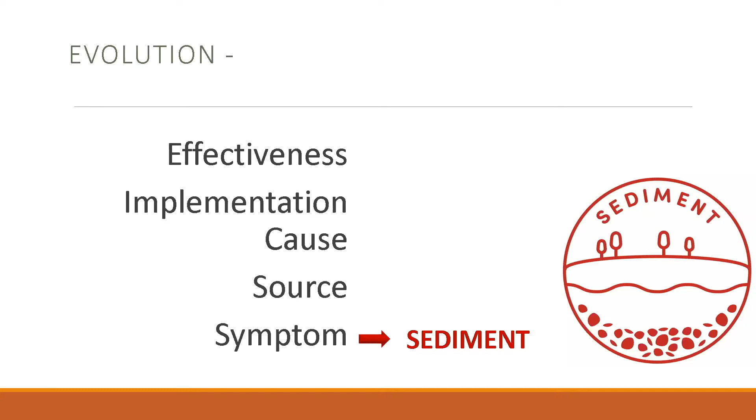And on a linear construction project, it's hard to make a sediment trap big enough to manage all the sediment you're generating if that's all you're doing. So we looked toward the source, and we realized that as we gave ourselves some cushion between us and that resource or area to be protected, we were getting closer and closer to the source of the problem. And so we saw that the more soil particles we could keep up here, the less burden it was to try to catch them down there, if that makes sense.

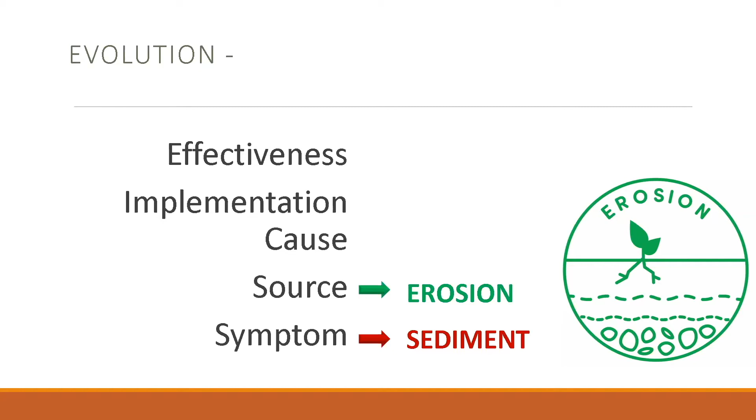And a lot of programs stop there. They call themselves cultured once they realize that it's erosion and sediment, or sediment and erosion, and not just sediment control that we're trying to achieve here. But we wanted to know more. Here in Alabama, the cause of that erosion is water. It's water flowing to us, it's water landing on the project, and so we developed this mantra of clean water in, clean water out.

And we decided it wasn't our responsibility to clean up someone else's water as it flowed through us. It was our responsibility to not add sediment or add pollutants to that water. And so we started diverting water around and under and over and away from our construction site.

We saw that it's near impossible to get sediment out of flowing water, but you can get flowing water away from your sediment. And so we started managing water and then realized that, you know, somebody's got to do this for us. We've got to convince our contractors that these are things that are important to us.

And we realized that our contractors are capable people. They are smart, they are innovative, they're also willing to do just about anything we ask them to do, as long as we tell them up front and we're willing to pay for it. And I think if you talk to your contractors, or if there are contractors on the call today, I think you would agree, if we tell you what we want and we're willing to pay for it and tell you up front, you can do just about anything we ask you to do. But we have to let you know, we have to tell you along the way.

And so at ALDOT, we realized, really later than we should have, a couple of years into this evolution, that communication is the best management practice. And so we work through these, what we call the 5 pillars of construction stormwater management. And those are really in order of priority, they're in order of effectiveness, and they're in an order of economy. You know, if we think about how much it costs to communicate with someone these days, not a big cost, especially when you compare that to some of our practices and products that are intended to capture sediment.

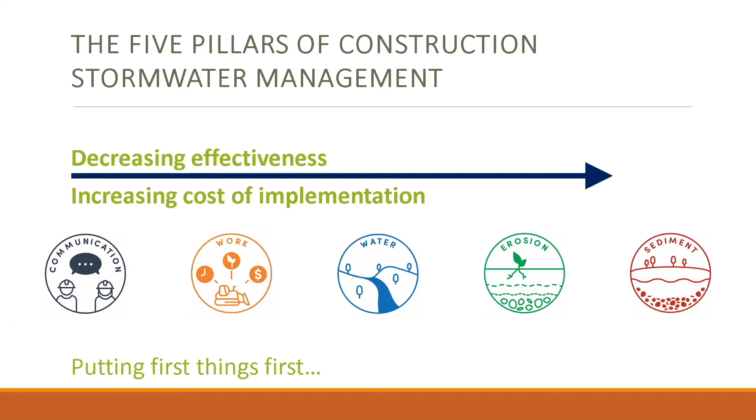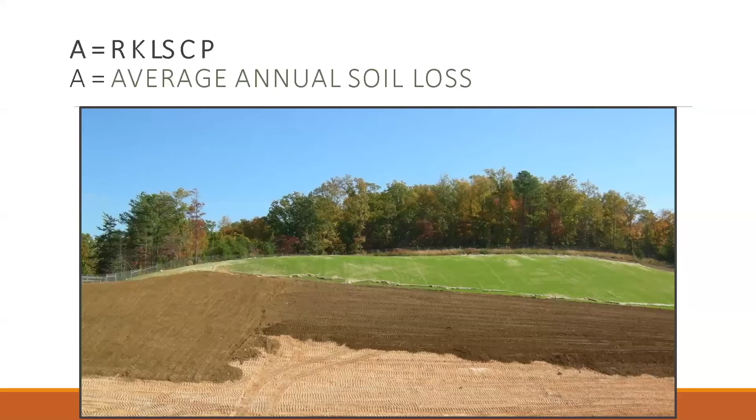So we learned about the 5 pillars. That kind of evolved over time. We also learned a lot about the revised universal soil loss equation. And I had a tendency to get really nerdy with the RUSLE equation and all those fancy and nice variables. You could plug numbers in and spit out some good information. But at the end of the day, what I learned the most about the RUSLE equation came from the product, the average annual soil loss from that slope or from that area that you're studying, and it's measured in tons per acre per year. And so what we want is the tons or the mass of sediment to go down.

And in order to make that go down, we have to either or both reduce the area of disturbance and/or reduce the duration of disturbance. So ask yourself, can we reduce the area of disturbance? Now answer, yes, we can. Can we reduce the duration of disturbance? Yes, we can. But it takes some intent. We have to manage communication and manage work to make that happen. And so those are some things going into this case study that I want to talk about now.

This is an interstate widening project, and please don't think that this only applies to interstate widening projects. Even if you work for a Department of Transportation, you may not ever get the opportunity to work on an interstate widening project. Just know that this case study does apply to other forms of construction and even other areas of transportation. So this project, you can see we're going to add 2 lanes to a section of Interstate 20, Interstate 59 in Tuscaloosa, Alabama. So Tuscaloosa is the home of the University of Alabama.

Any Alabama fans out there? Yeah, me neither. I'm an Auburn graduate. I do appreciate you guys sending the Tagovailoa family to us. I enjoyed watching Tua in college and his brother play in high school here in Alabama. Neat family and absolutely great athletes. But anyway, all that's going on in Tuscaloosa, Alabama.

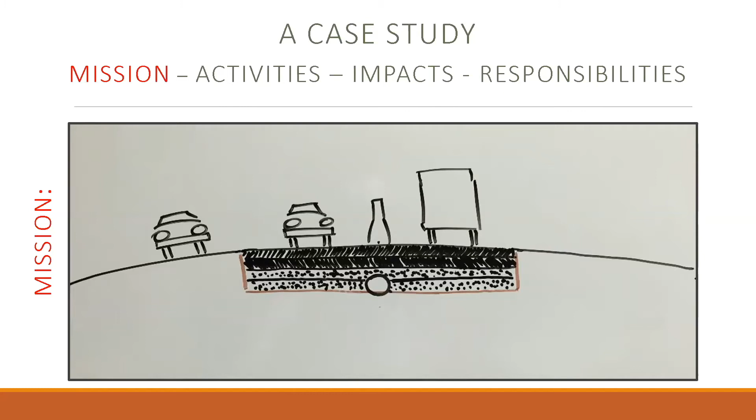So here's kind of the way I see it going into this process. This is where we were at the beginning. This is where we wanted to be. And you guys know that we need some structure, some drainage up underneath those cars as we widen to the inside of this interstate.

So thinking about this project, we're walking through our mission. We've seen our mission, what we've got to do. These are the activities we have to engage in to get there. We'll talk about impacts and responsibilities later. So in order to fulfill our mission, what's the first thing we have to do to widen this interstate?

From the perspective of a stormwater professional, what's the worst thing we can do to widen this interstate? Well, we've got to strip off all that vegetation. So 9 miles of roadway, that's about 60 acres of disturbance. And from that point forward, we are at risk of sediment leaving this project.

We don't have a lot of room on the outside within our right of way to capture all this sediment that's trying to leave. We don't control the rain, we don't control the soils, we don't control our neighbors. And so every time it rains, we're at risk of losing sediment from this roadway.

So we do a little cutting, a little filling, we compact, we put our drainage in, and this is where it really gets interesting. This is where Barry would get the call and say, hey Barry, what are we supposed to do now? We've got the regulators on our back, or we've got the water keepers on our back. What do we do?

And there's nothing you can do. Even knowing the 5 pillars of construction stormwater management, there's no sediment control to be heard of. You can see a piece of plywood on the end of that pipe. That is a best management practice. That's how we keep heavy particles from getting into that pipe. But we know any water that goes into that pipe is going to be carrying finer particles and is going to be turbid.

So the best thing we can do at this point is get out of there. Let's get this place covered up and move on. Same with our inlets, the wattles there, those are for show. The best management practice we have available to us here is that open excavated pit. Water goes in, it slows down, fast water meets slow water, so sediment starts to drop out. But we know any water that gets in that inlet is going to be turbid and we're going to have problems. But I don't know what to do about it otherwise.

It's just a tough stage of construction. But at some point, we get our drainage in, we get our crushed aggregate on top, and we get to a stabilized state, a somewhat stabilized state. But that takes a while to get there. So on a 9-mile project, maybe that's 8 to 10 months here in Alabama to get to this stabilized state. And again, 8 to 10 months of risk, 60 acres of disturbance.

So let's look at our impacts now, and they're obvious: water quality, habitat, private property, regulatory actions, civil actions. Something that was important to me is embarrassment and loss of trust and grace. My job was to keep us out of the newspaper, basically, and certainly keep us out of jail. And I had spent years and years trying to build up trust and grace among our regulators and environmental groups and our other stakeholders. And we know that one mistake, one slip up can erase years of goodwill as we're trying to build that trust and grace.

And so those are kind of the potential impacts that trigger our responsibilities. And so on this project, our regulatory requirements were pretty stringent. We had our general permit, but we also had a TMDL because of a receiving water that required this impaired receiving water required a 32% turbidity reduction and a 60.8 NTU limitation. And that's not against background. That is, the water leaving your project had to be less than 60.8 NTU, which you guys know is a tough thing to do, especially if you're working in clay soils.

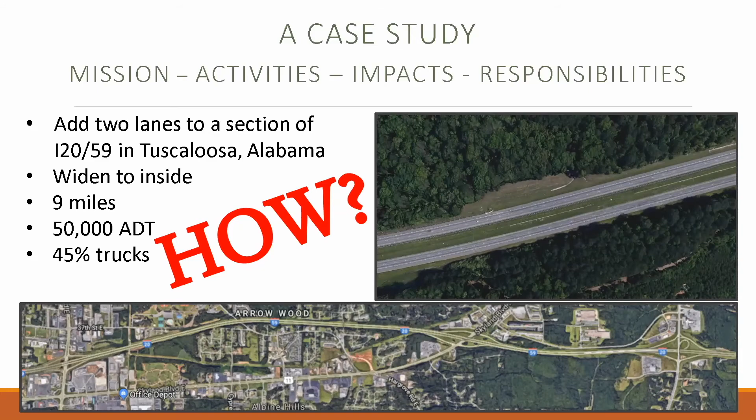And so we started out with, okay, what do we have? What are the tools we have available to us? And I said, all right, we've got the revised universal soil loss equation. We know if we reduce the area of disturbance and the duration of disturbance, we can get closer to winning on this. We can reduce the mass of sediment that's trying to leave our project.

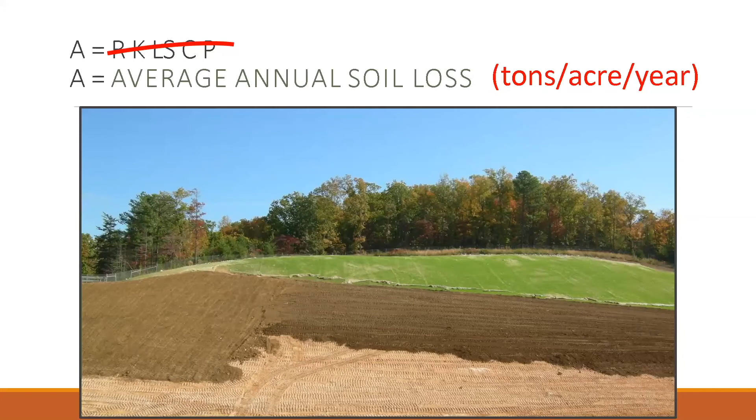We had the 5 pillars of construction stormwater management available to us, except we really didn't have 3 of them. You remember that picture of the median area. There's not a good way to manage sediment. There's not a good way to manage erosion, really not a good way to manage water in that setting. You're working from edge of pavement to edge of pavement. How do you do it?

So we had managing communication and managing work on our side. And fortunately, those 2 pillars are more effective than the others to begin with. So we started out in a good way by managing, bringing that team together was part of managing communication.

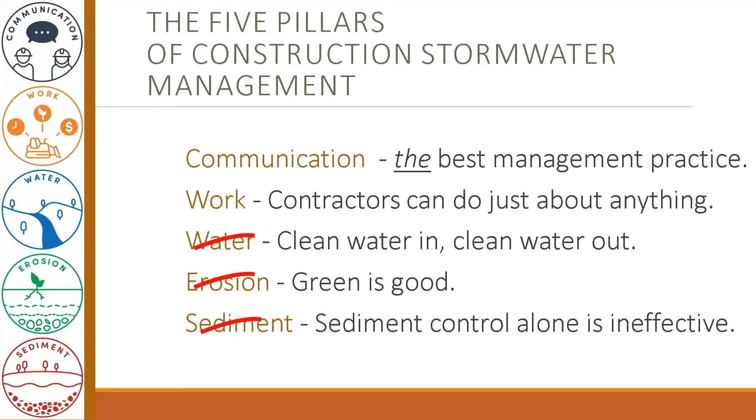I brought the river keepers in and I said, look, and our regulator also, I said, look, we're going to try some things on this project that we've never done before and you've never seen before, but here's where our heart at is, here's what we're committed to, and I need you to trust us to get this project underway and just watch. We'll give you tours of the project. We'll bring you out. We'll do whatever we need to do to keep you engaged in this project. And so those were kind of the ways we managed communication with our contractor.

We told our contractor through plan notes and a mandatory pre-bid meeting what we did. We went from vegetated to stripped to excavated to covered in about three steps within the same day. So let's look at that again. We stripped, cut, and covered really in one operation.

We told our contractor that at the end of the day, this project has to be covered up. We don't want to see any disturbed soil at the end of the day, and certainly not before a rain event. Everything gets covered up, and we gave them the tools they needed: an extra pay item of crushed aggregate, and a pay item of polyethylene sheeting. We said stabilize this project before you go home in the afternoon. If rain's coming, then you stabilize it then.

So what we did is we went from 60 acres of potential disturbance to about one third of an acre of potential disturbance. We went from 8 to 10 months of duration down to just a few hours of disturbance. Thinking in terms of sediment loss and applying the RUSLE equation, we reduced the sediment yield by over 99%, because we dropped the acreage, the area of disturbance, and the duration of disturbance down simply by doing our strip, cut, and cover technique. I'll show you more in just a second.

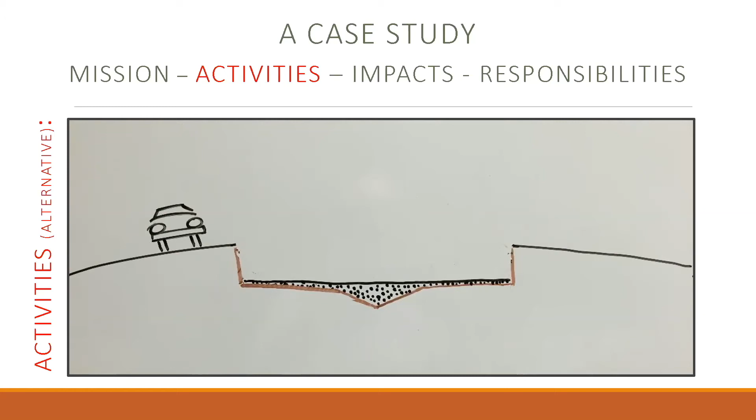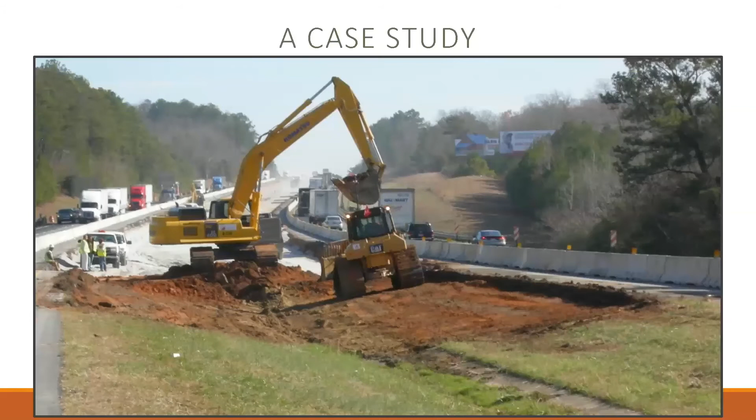Once we were there, we could move on down the road. We could get our drainage in, our crushed aggregate in, and here's what our whole site looked like. This is all the activity going on the site on a given day. I'm standing on undisturbed grass, solid vegetation behind me, looking at our work area, and then beyond that, stable crushed aggregate base the rest of the project.

Looking back the other way, by the way, look at that truck traffic, 45% trucks on this road. This is me standing on the crushed aggregate base, looking beyond the work area at grass as far as you can see.

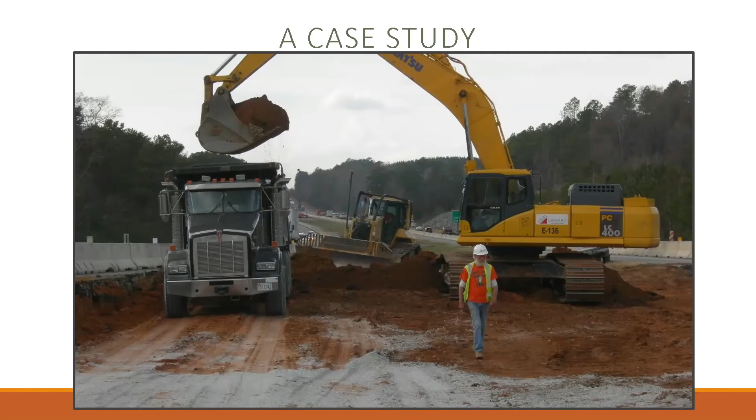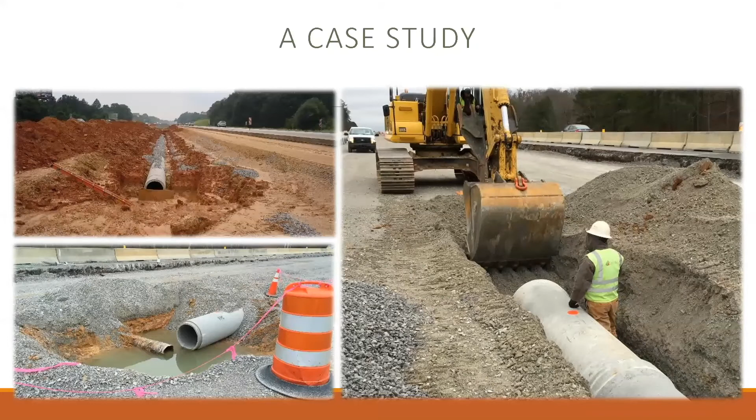So compare these two work areas, the way we used to do it versus the way we did it on this project. Look at drainage installation, the way we used to do it in the upper left. On the right, we're excavating into clean material, we're sitting on clean material, we're backfilling with clean material. Once we got the area covered up with aggregate, we really didn't have any potential erosion coming about. Our sediment control really went to gravel control, which is a much more manageable proposition, by the way.

So you can see what some of our inlets look like there.

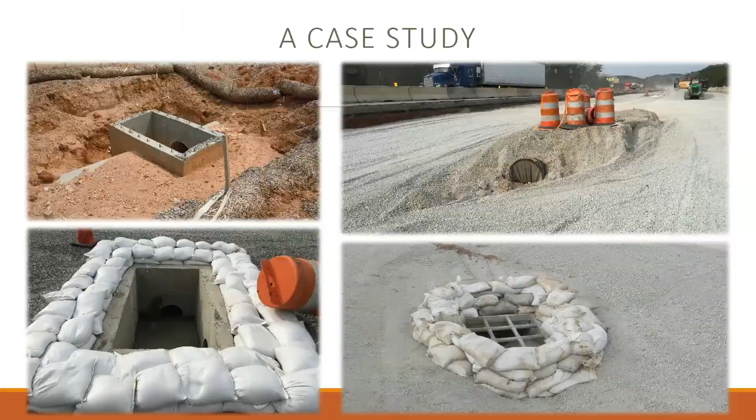I want to get to your questions quickly, but I have a couple of questions that I know you have, so I want to get these out of the way. John, I'll walk through some questions on my own that I know they're going to have, and then we'll line up. So you guys be thinking of questions you have also.

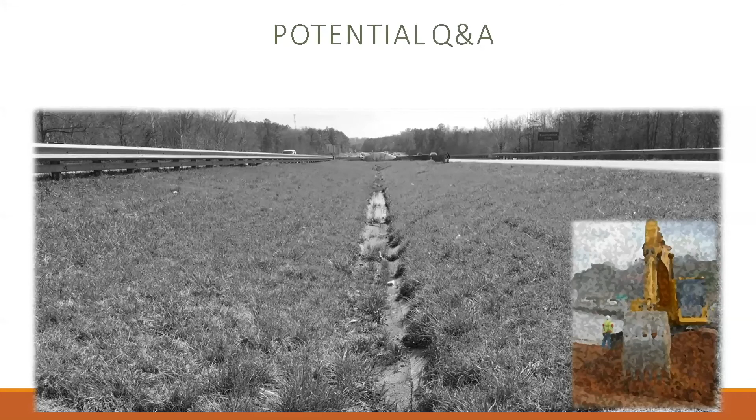As we're gathering this group together to try to come up with a solution for this project, the number one question our designers ask, which is a question that has bugged me for most of my career, is: Barry, we can't dictate the contractor's means and methods, can we? My response is, why in the world can we not? We're paying the bill, we're writing the check. The contractor works for us. We know that the contractor has different interests than we do. Sometimes our interests are in alignment, but sometimes they're not. We've got to protect our interests. We have expertise where they don't. So if we know that something is going to work, or if we know that something's not going to work for us, why in the world would we not dictate those means and methods? The drawback to dictating a contractor's means and methods is you limit their ability to be innovative.

You limit their ability to save money, which sometimes does come back to the DOT. But where we know something needs to happen, we need to dictate that.

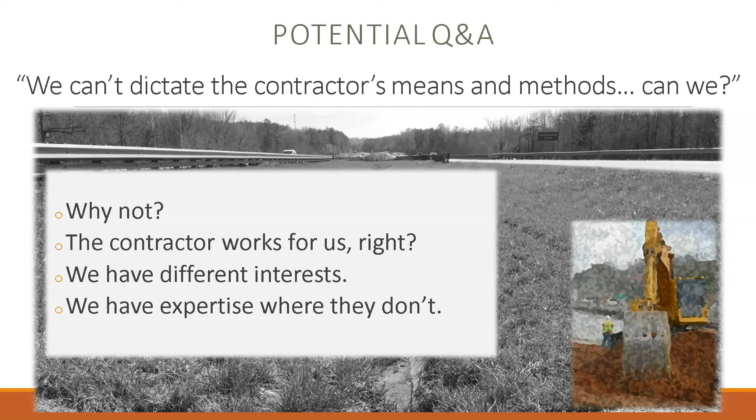So another question, and this was really my fear from early on, was, man, we're going to slow production down tremendously, and it's going to take the contractor 10 times as long to build this project if we pursue this approach to managing construction stormwater. And I was actually wrong.

I visited the project several times, and I would ask the contractor, hey, how you doing out here? What do you think about this alternative approach to managing construction stormwater? And the superintendent would say, you know, unless there's rain falling out of the sky, we're working. And that's different than in the past, because in the past we had this dirt bathtub that would fill up with water and mud, and we'd have to let that thing dry out for weeks on end.

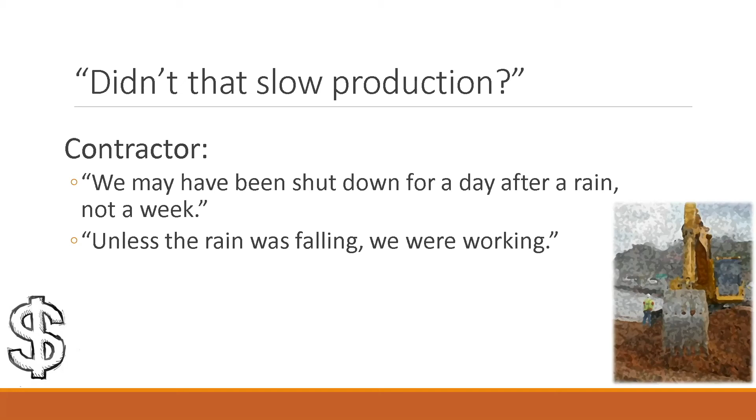He said that we would have never started this project in November as we did. We would have waited until April to start this project. We would not be shifting traffic today on the day that I happen to be out there. I asked the contractor, okay, you're talking about all these increases in production and things that have helped you.

I actually called together a debriefing meeting toward the end of the project with the contractor, with all the folks that we had on the team, our project inspection and management staff, and I just asked the contractor point blank, give me a number, how did this help you with your production? And he said production was increased by at least 35%. And I heard him tell a construction engineer on his way out later, it had to have been more than 35%. Barry caught me cold. And so we know that production was increased.

So a big question you might be asking, you see that, in essence, we're replacing dirt with rock. So our fill material, our cover-up material was aggregate. That's got to be expensive. And you're asking how much did it cost? And so I asked our division staff to do an analysis and give me back some feedback. And they didn't do a great job.

And honestly, ALDOT doesn't do a good job of looking back to see how we did, whether it was success or not. We don't do a good job of quantifying that. And it's probably because there's so many variables at stake. So on this project, I asked that a cost analysis be done. There were significant costs above what it would have cost. It was about $500,000 on top of the contract cost. But we started looking at some of the other costs or benefits to the project.

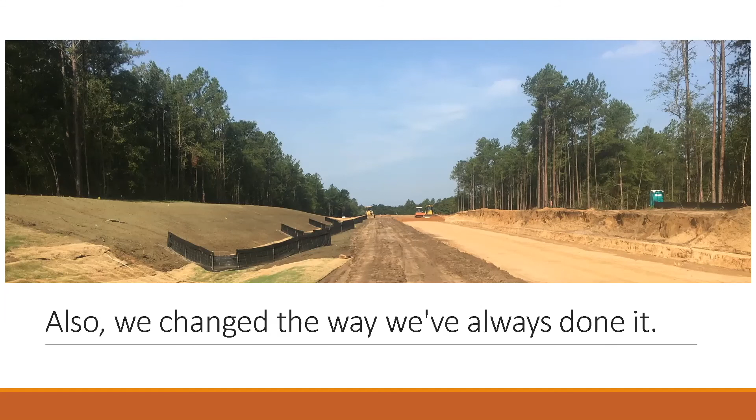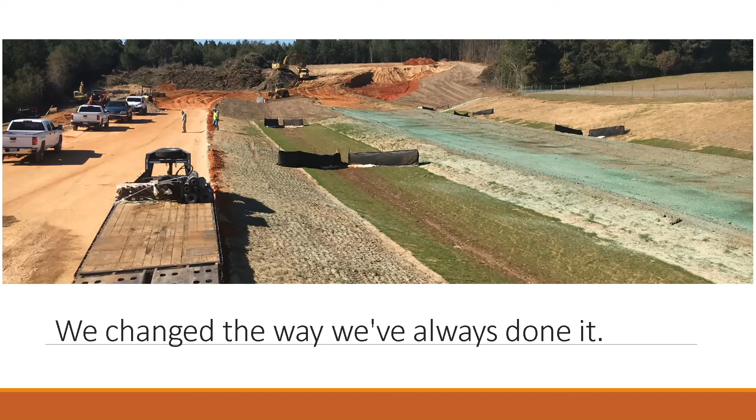This is a shot of a 6-lane highway, and the contractor's constructing it half at a time. The center line's over there by the porta potty. He's constructing the eastbound lanes, already got topsoil and sod and vegetation going on one side, hasn't even cut the trees on the other side of the road. Another project here, you can see we've even got some asphalt and shoulders and median sodded. The contractor hasn't even cleared the remaining two miles of this project.

Another shot, a similar shot, you can see we've got vegetation growing at the top of the slope, installed sod, topsoil being placed at the same time the ditch is still being excavated. And that's due to a contract requirement that says, contractor, you shall start your permanent stabilization efforts once you get 20 feet into this cut.

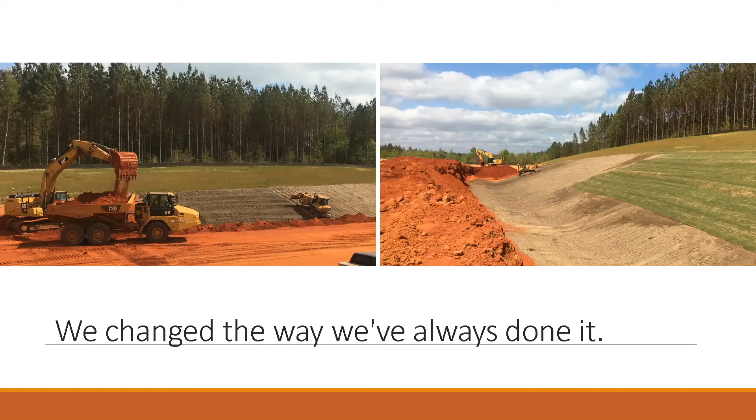So a lot of benefits there, a personal benefit here. John Wathen said he has never seen a better run road project by AlDOT on his blog, but then he reserved his right to hate us in the future, talking about a future project he calls the Boondoggle Expressway. So anyway, I'll take it. That was a win for me.

So John, let's hear a couple of questions, and if you would just reserve me maybe 2 minutes at the end. I've got a quick story that I'll wrap up with after we answer questions. So what do you have? Very good, Barry. Thank you so much for your presentation. Do have a few questions here.

How much did seasonal weather play into your construction schedule? Yeah, good question. Here in Alabama, we kind of laugh when we hear about other states having to time their construction season to coincide with their wet season. We don't have a wet season in Alabama. We don't have a dry season. It rains pretty much year round.

Our driest months of the year are say October and November, but those are also in the middle of hurricane season. So even in our dry times of the year, and this year's been really special with hurricanes coming out of the Gulf, we can have and did have just a few weeks ago a 5-inch rain. The driest part of the year, a 5-inch rain on one of our construction sites. So really good question, but we just simply don't have wet seasons here. And again, the contractor said unless rain's falling out of the sky, he's working on this project.